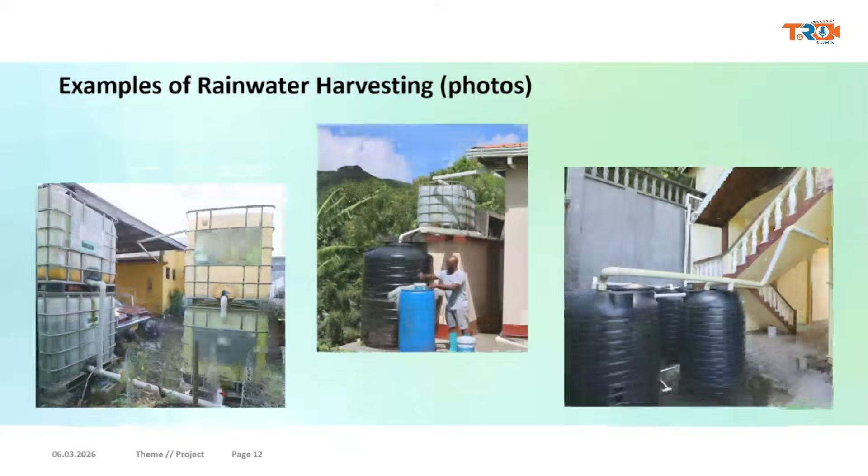These are just some images of typical systems, and I want to go straight to dealing with the water sector challenges in Grenada. The key question this afternoon is, are there challenges with the water sector in Grenada, Carriacou, and Petite Martinique? The answer is, of course, yes. This is the reason we are here. And what are those challenges?

The challenge starts and ends with climate change. We currently have increasing temperatures, and you'll see a chart there with an upward trend, the top chart showing that for the last few years. Since 1901, that data is showing the trend up to 2021, the top chart, showing the temperature increase.

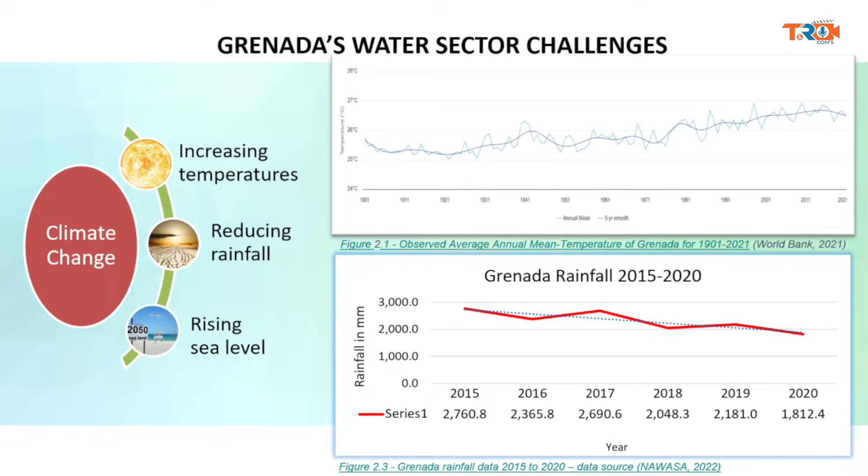And then the bottom chart shows rainfall decreasing. We only have data from 2015 to 2020, just a 5-year period, but this is the key challenge. Along with that, that is causing a rise in sea level. So all of this is compounding the issues relating to water and the scarcity thereof.

Additionally, we have other issues like aging infrastructure and economics, growing population, and also urban development, which are all posing a challenge. So what that has created for Grenada is a scenario I want to show you next.

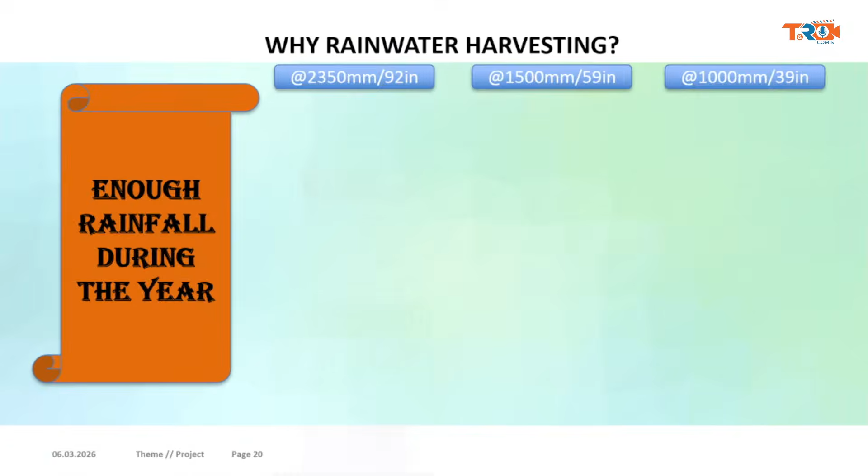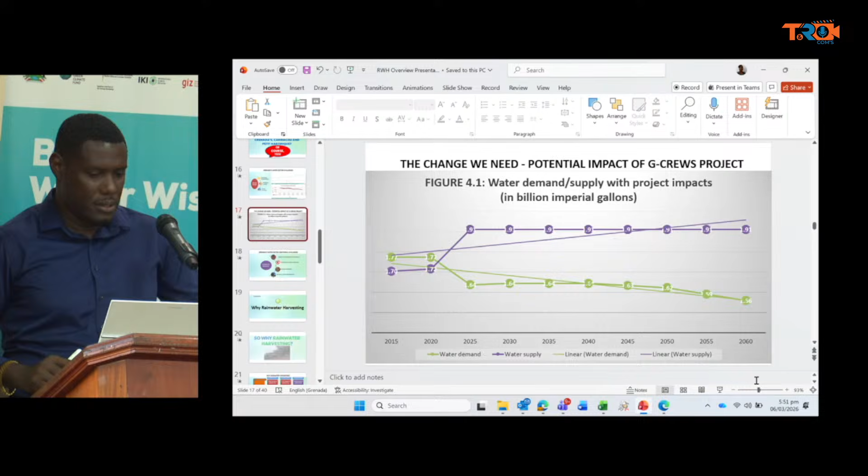That was moved to the bottom. Okay, let me just jump to it. Sorry about that, I have to quickly go to that and come back up. Jeanine at the back, can I just ask you to put the slide back to the top? The one with demand and supply. I don't know. Yeah. It goes after. Yep. Not this. This is after the one with the current, Grenada's current and projected water situation, BAU. Not this one, all right.

So while that is being found, I wanted to illustrate what climate change has caused. It was really important that you see this, because this is what we intend to do by rainwater harvesting, but we want to show the chart that's prior to it. Delete it. All right, so currently

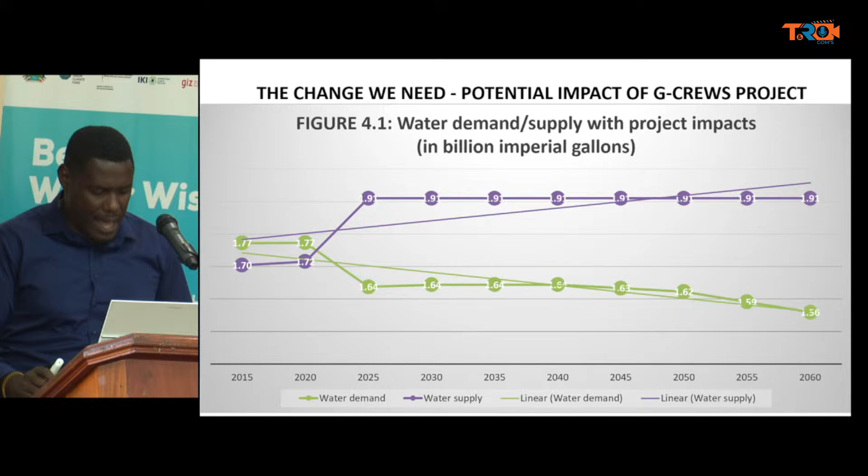Grenada's demand for water is about 1.8 billion gallons of water per year, and we're only able to supply about 1.72 billion gallons. While that looks close, it's a difference of about 80 million gallons every year. So that's a significant amount of water difference.

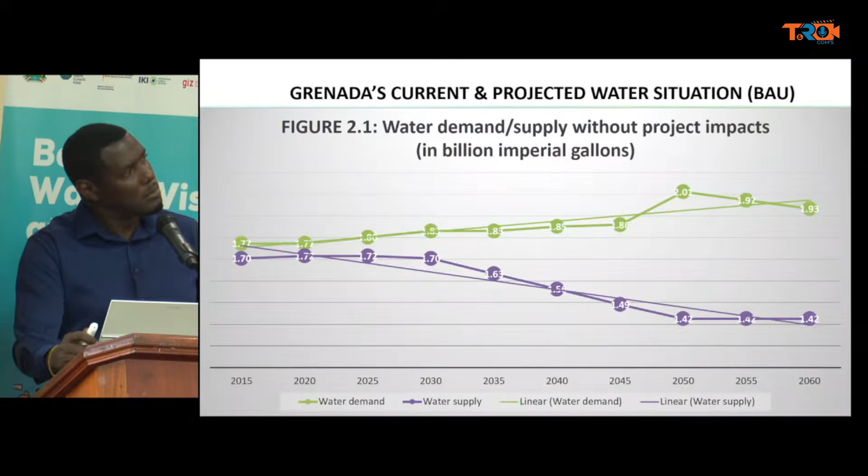And so the question now is, why rainwater harvesting? We may say, if we're having less and less rainfall, then why are we using rainwater harvesting as a safety net or as a mechanism to go through that period? The reason is simply because we have enough rainfall during the year. And if you would look on the screen, let me take a mic and step in front a little bit.

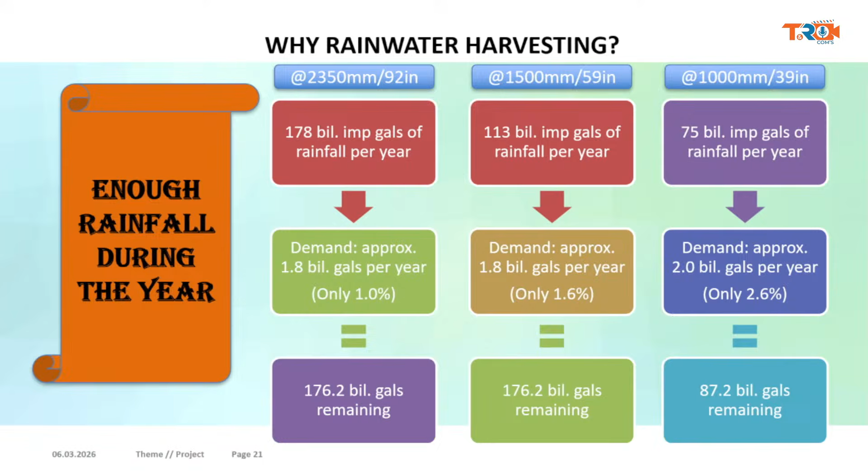So if you look on the screen, you notice that we currently get about 92 inches of rainfall every year, and that amounts to about 178 billion imperial gallons of water. We only need 1.8 billion gallons, which is only 1% of the amount of rain that falls on our island.

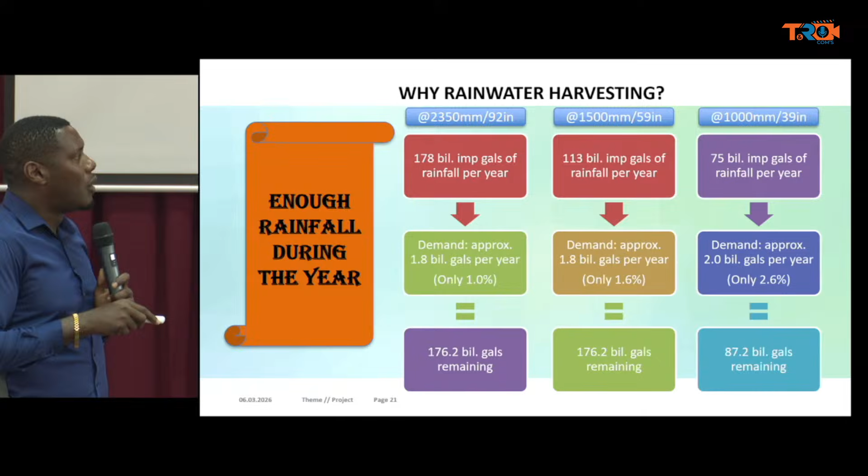In a bad situation, the rainfall drops to about 60 inches, equating to about 113 billion gallons of rainfall per year, meaning we would only use 1.6% of annual rainfall. We've projected a dire situation going as low as 39 inches of rainfall per year, and if demand increases to about 2 billion gallons, we would only use 2.6% of annual rainfall.

So what that tells us is we have sufficient rain falling on our island, even if rainfall is getting less. That means we just need to catch it and use it, and hence the reason rainwater harvesting is being promoted as a sustainable way for us to deal with our water needs.

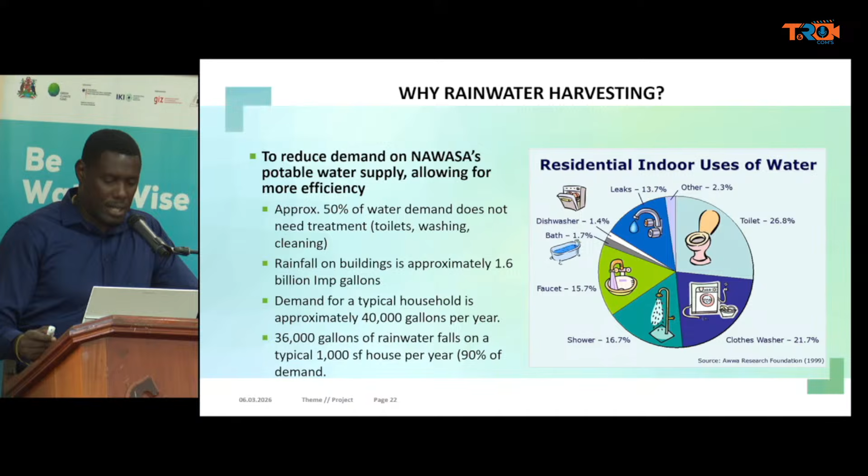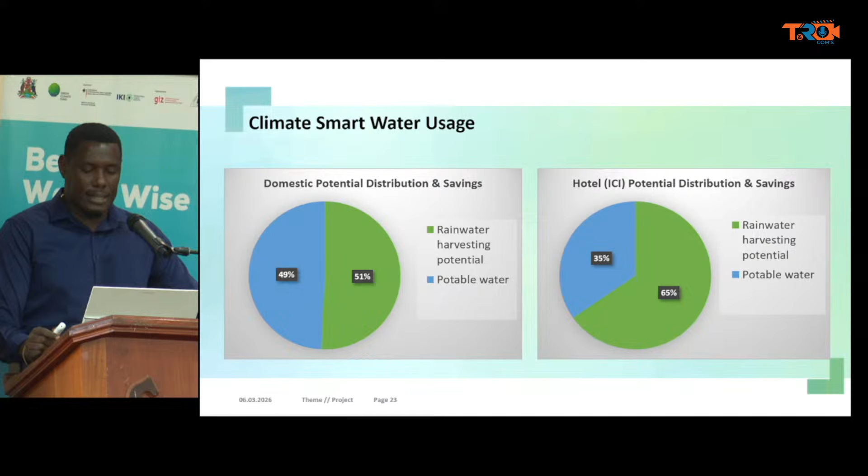In Carriacou, all the water comes from rainwater harvesting. This other chart will show us the potential for domestic use. We could save as much as 50% with rainwater harvesting domestically and as much as 65% commercially, especially in hotels and restaurants, if rainwater harvesting is used.

There are cost savings for using rainwater harvesting. Of course, the rainwater is free, and you will learn today that neither we nor NAWASA are going to be charging you for rainwater or for collecting it. So you can collect it and use the water free of cost, except for your initial installation of your rainwater system.

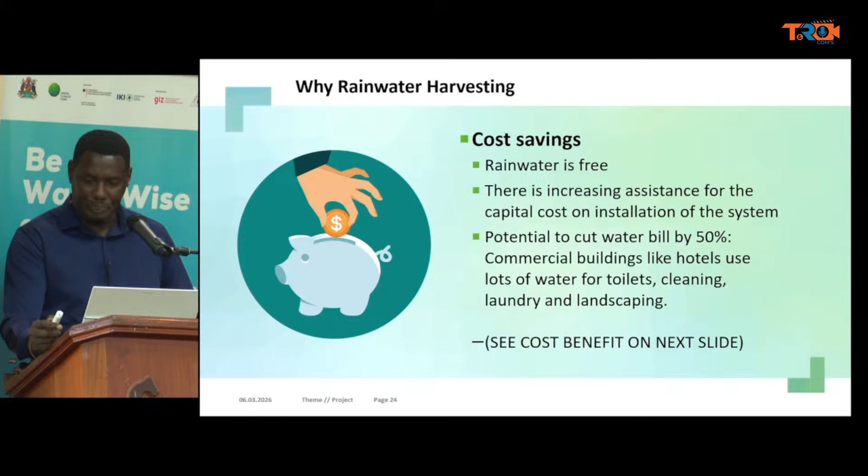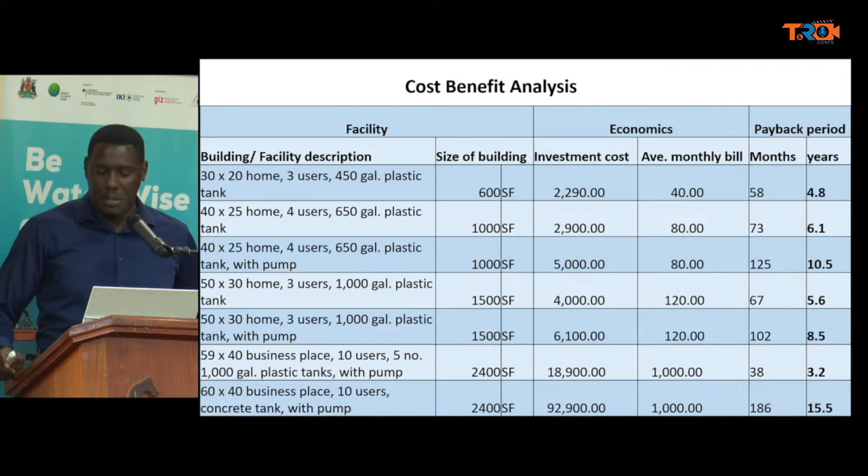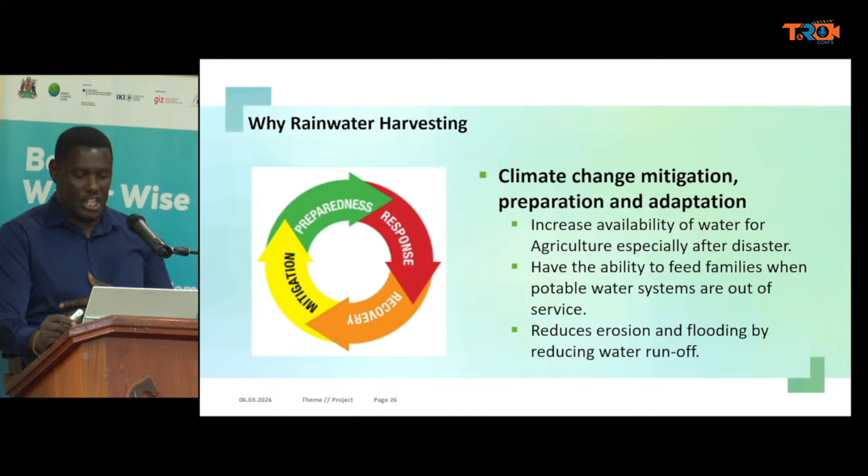So rainwater harvesting is also a climate change mitigation, preparedness, and adaptation strategy, but there are some limitations, limitations that we could work through.

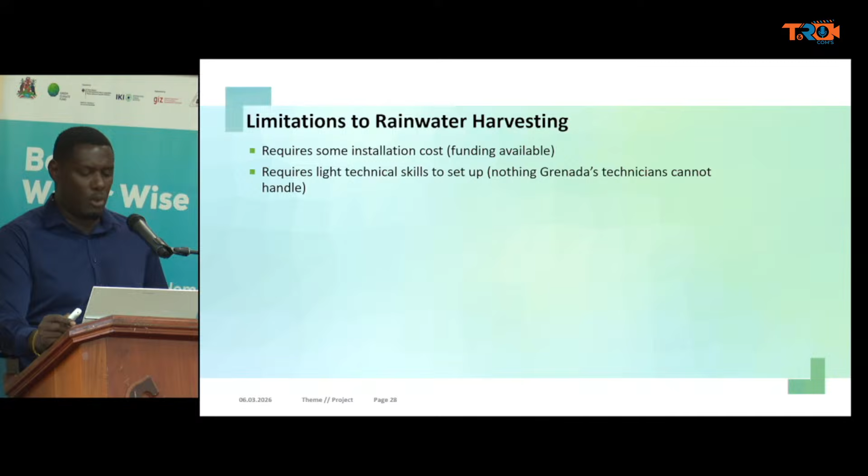First of all, it requires some installation costs. Then it requires some technical skills, which most plumbers can handle. There's an issue if we get little to no rainfall, and of course, we showed the graph to indicate that trends show we will still have enough rain even though rainfall has reduced.

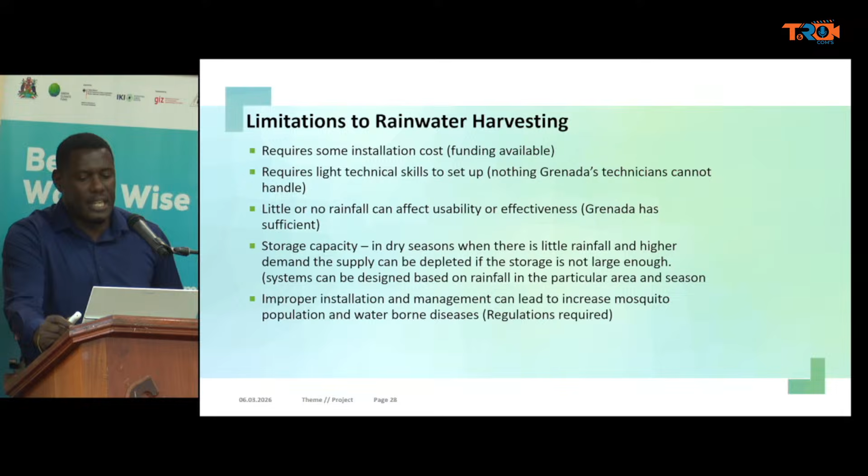Storage capacity could be an issue, and if rainfall is getting less, you'll have to build larger storage, increasing your investment cost a little bit. Improper installation and management can lead to increased mosquito population and other waterborne diseases, and the systems require periodic maintenance, like everything else. So we can mitigate against all of these limitations.

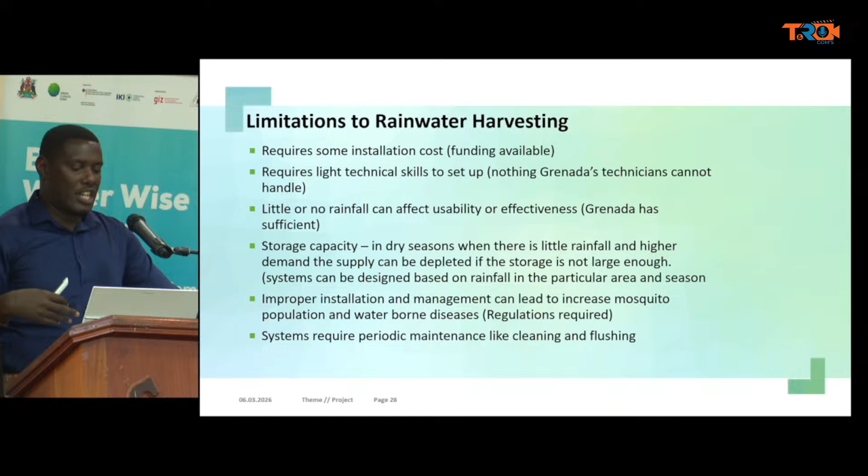This brings us to the recommendations, which were to make rainwater harvesting mandatory for new and existing buildings, and also make rainwater harvesting mandatory for all industrial, commercial, and institutional buildings and facilities, so all government facilities. We intend to have everyone have a rainwater system, similarly to Carriacou.

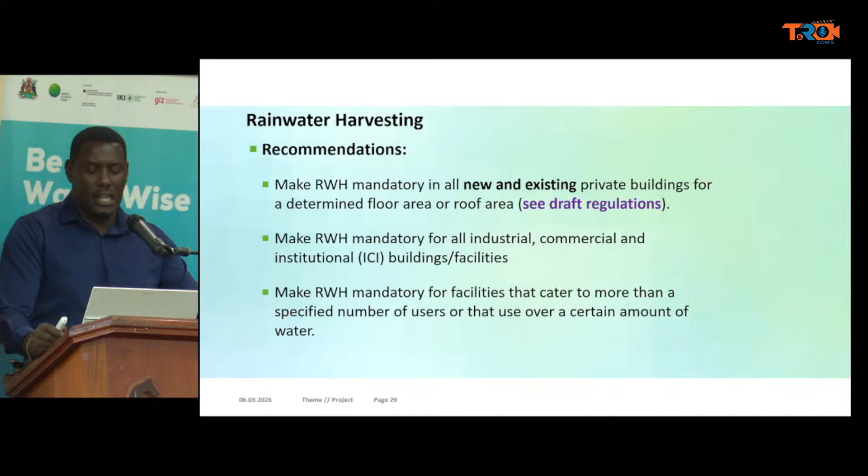So I will stop here at this time, and we're going to hear some more about the regulations itself, and later on I probably will tell you more about the technical aspects of the regulations and what it means for you and for us as a people. I will just put this on the table, I'm a civil structural engineer, also water engineer by profession, and so this has been developed and designed from both a scientific and a data-driven approach.

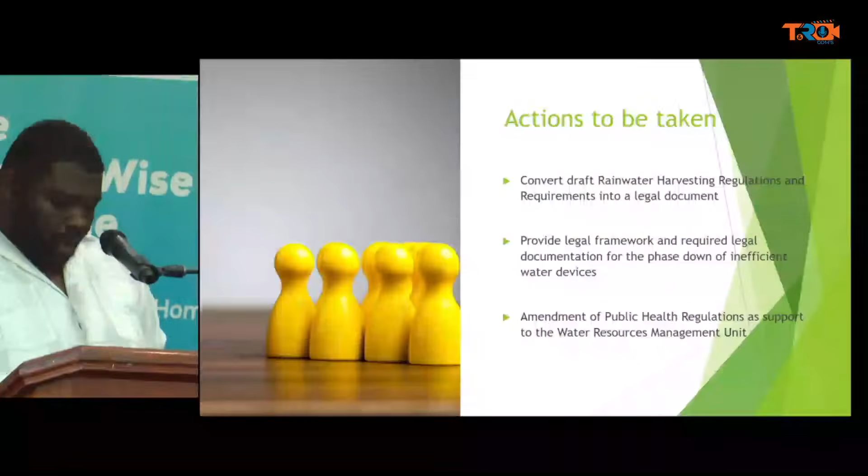Coming out of that, we also drafted a memorandum of understanding, so that suppliers would be able to provide, let's say, water tanks at special rates, and efficient water devices would be provided with rebates, just as some examples. So we did templates for that agreement.

In order to have legislation passed, most institutions need to take a cabinet memo with it, which is basically an introductory document that goes to the cabinet as well. So that was also drafted for the rainwater harvesting regulations. That is the single instrument we're going to be looking at this afternoon.

It is going to be within five parts. I'm not going to be too granular in the legal sense, but I'm going to provide a synopsis of what the regulations expect to do. There's the preliminary, which is more or less the beginning.

The design and planning requirements, which indicate the type of designs the rainwater harvesting device should have. There is the governance and institution part, which shows the framework and the responsibilities of the various government institutions. There will be the quality elements, including enforcement, and then there are the final provisions in terms of the operation of the regulation.

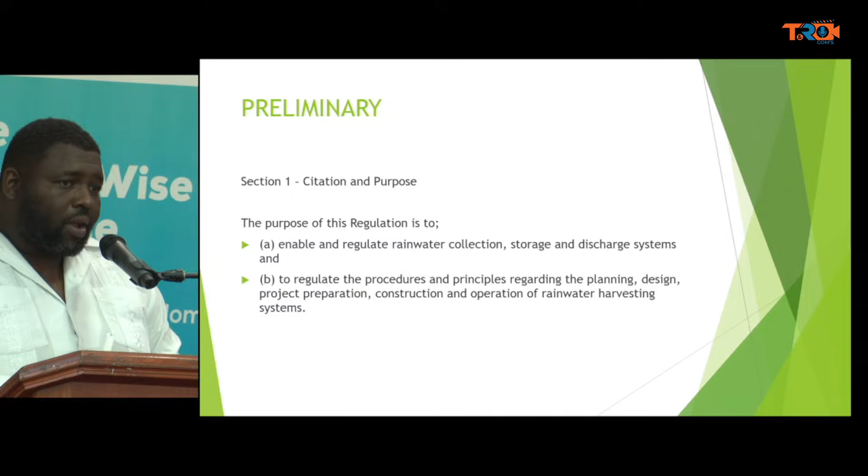It's important to note that this regulation is for the regulation of the rainwater harvesting system. Naturally, we cannot say when rainwater is going to fall. What this is about is being able to capture that rainwater and convert it to positive use. So definitely you wouldn't be charged for not catching rainwater. You just have to be able to conserve it and use it wisely.

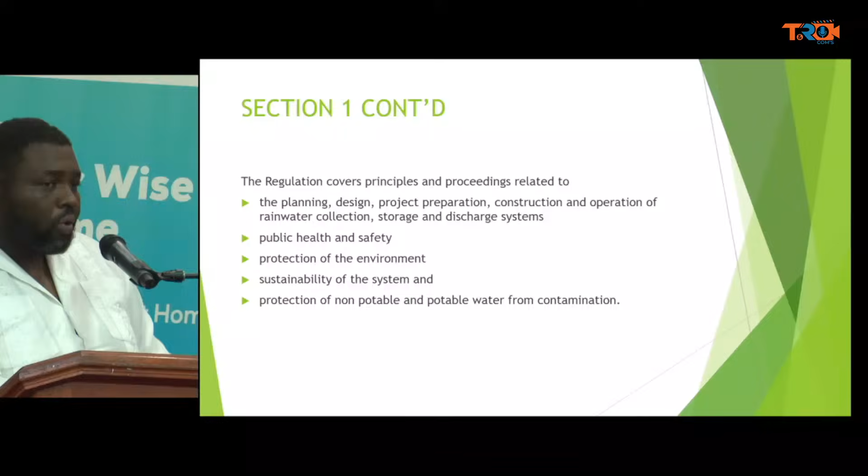Also important to the regulation is public safety. You have to ensure that the water is of a quality that could be used. You also have regulations which I will come to. You need to take particular measures if you want to use the rainwater for drinking purposes as opposed to non-potable or non-drinking purposes.

In terms of design planning, if you are designing a new building, you have to submit an application to the PDA that has to have an outline for a rainwater harvesting system. Your building has to be at least 250 square feet or 23 square meters. If it's less than that, a rainwater harvesting system will not be needed. But anything from 250 square feet and up, for domestic, which is residential purposes, you would need to have a rainwater harvesting system, and depending on the size of your residence, that would determine the size of the system.

Naturally, if you have a commercial enterprise or business, or an institution such as this school, they're going to have a higher requirement in terms of the rainwater harvesting system.

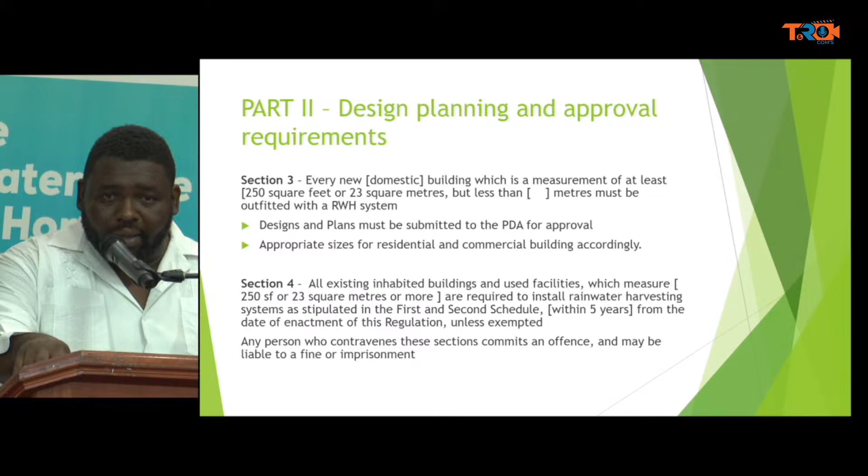Now, we come to buildings that already exist. They will also be required to submit to the PDA the rainwater harvesting system which they will be implementing, and they will have a period of five years to implement it, also starting at 250 square feet. So this is expected to be mandatory for all citizens of Grenada who have a residence. Now you may ask, are there certain areas where persons may be exempt from doing this?

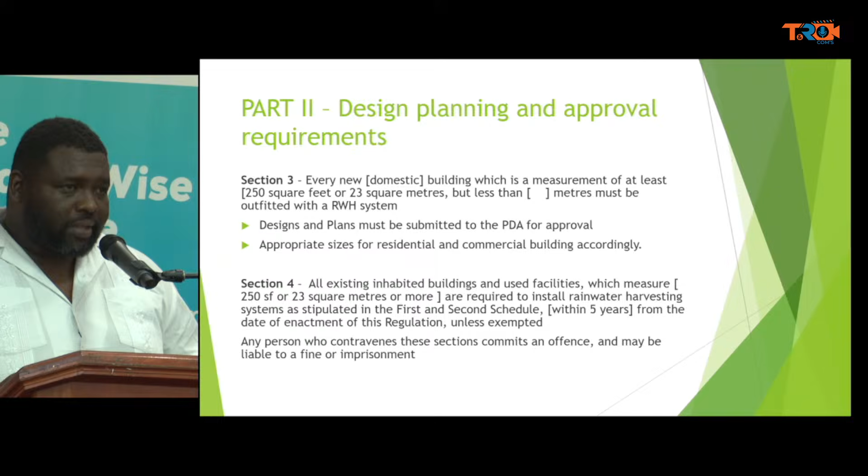And that answer is yes. So the PDA would be the body to determine what these exemptions would be.

However, some of the guidelines would be, let's say, it's a vulnerable household, or a matter of public safety. For example, if the area for the rainwater device is close to someone's boundary and could fall onto their roof, that would be a public safety issue. If a person is able to function with pipe water to their residence, and this can be determined, they may be able to have an exemption. They may also look at things such as age and financial circumstances, but each case will be looked upon on its own merit.

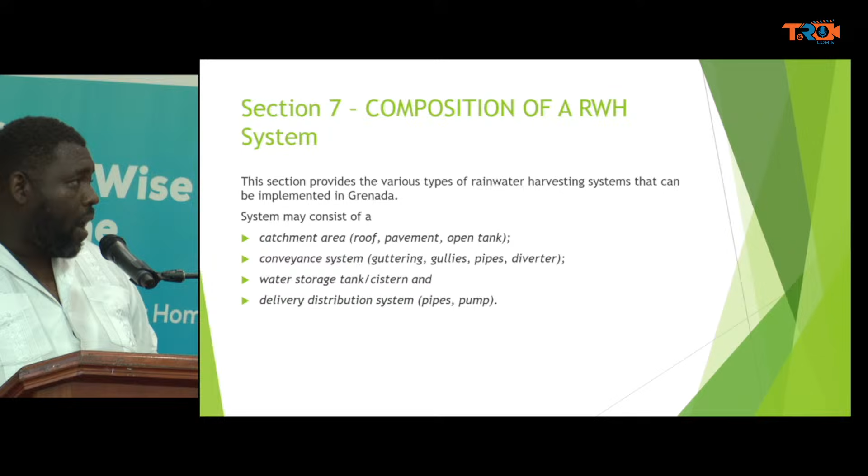Now we look at the composition of the rainwater harvesting system. These are best practice recommendations, but essentially, in summary, it's going to need a catchment area, which could be a roof or an open tank. It's going to need a conveyance mechanism once it's into that catchment area. Then you're going to need the actual storage, which could be a cistern or water tank. And then you need the delivery mechanism, let's say pipes, or pipes aided by a pump.

Section 8 deals with the structure to facilitate the system. These have to be designed by various personnel. Naturally, if it's a very small house with one tank, a certified plumber, for example, will be able to indicate the type of rainwater harvesting device you have. The larger it gets, the more technical the person needs to be.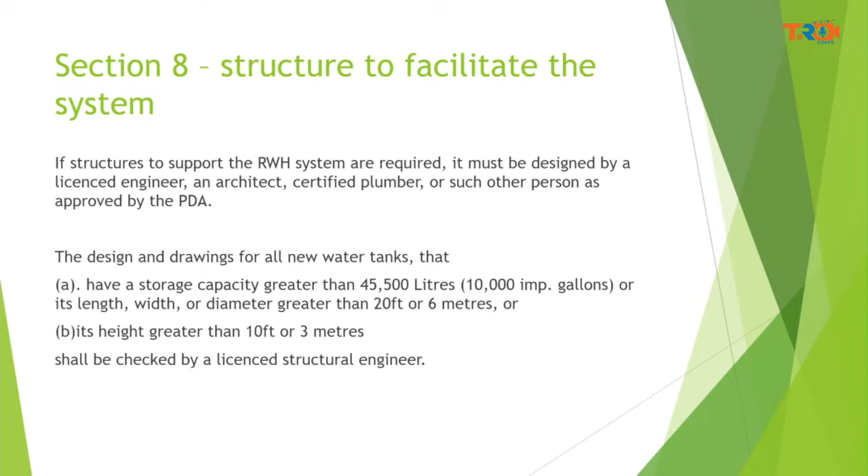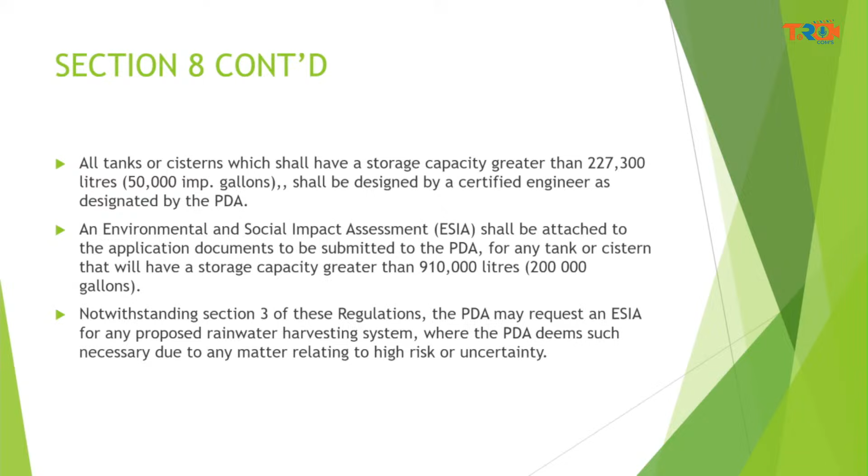So as you go forward, if it's like 10,000 gallons, for example, you're going to need an actual draftsperson. If it's even beyond that, you're going to need an actual engineer.

In terms of governance and administration, the PDA is going to be the body for the governance of this act. Coming under their act, these regulations will be formed because it's primarily a planning aspect. And they will be aided by the various government enterprises where necessary.

For example, they could be aided by the Ministry of Health, NAWASA. We have some consultations with Carriacou. In that instance, if they have any concerns, they can liaise with the Ministry with responsibility for Carriacou and Petite Martinique affairs and local government. But it is intended to be an integrated mechanism, so it's not just PDA alone. They're going to be working with other government agencies to make sure this regulation works best for the citizens of Grenada.

Naturally, you need to have enforcement mechanisms. Where persons may have a tank and it's suspected that it may not meet the relevant requirements, or they're serving non-drinking water as drinking water, the PDA has powers within their act to use inspectors to check out residences, and this has been linked in this legislation. If they need extra assistance—let's say the person isn't letting them into the residence, or releases their dogs—they could get the police force to come and assist them.

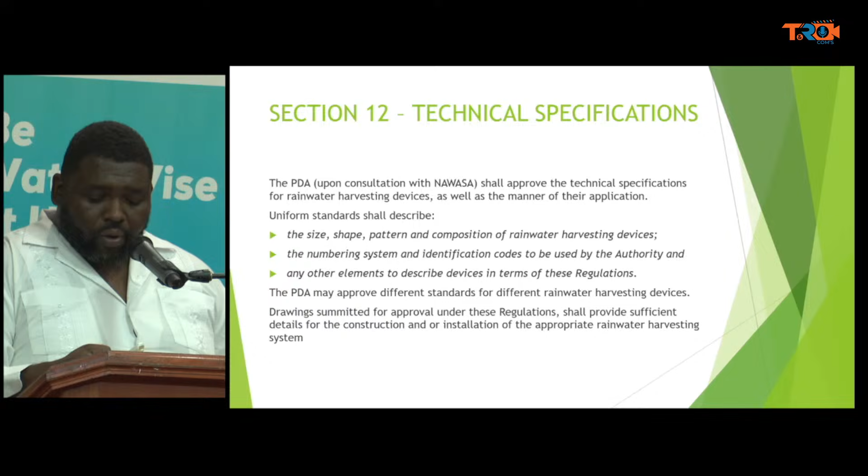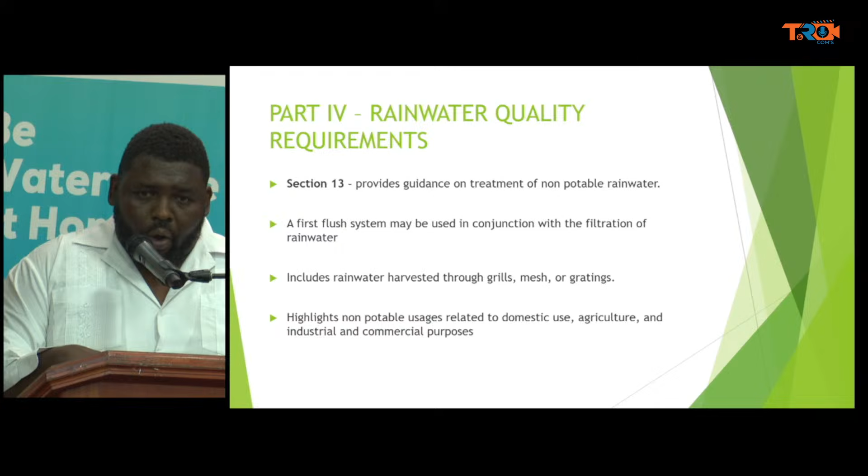They're also in charge of doing the various technical specifications, let's say identification numbers. That's one aspect. Now we come to the rainwater quality requirements. These are, of course, based on best practices. You need to have a first flush system and a diverter as well. And you need to ensure that we're dealing with water for non-potable or non-drinking purposes.

However, these are still prescribed with a limit. So you can't use the non-drinking water, let's say, for bathing or brushing your teeth, because it would still be a health hazard. So there are certain elements which you can do, based on the best practice mechanisms.

Naturally, you have to have some sort of filtration system to ensure that when it's captured—whether it's grill, mesh, or gratings—the rainwater could be used in toilets, washing clothes, watering plants, scrubbing and cleaning, once it has adequate treatment. For agricultural purposes, feeding of crops, feeding of animals, cooling off of machinery, are some of the areas it could be used for.

In terms of commercial enterprises, again, use in toilets, laundering clothes—especially in the hotel industry, as this is a very big tourist jurisdiction—scrubbing and cleaning, landscaping, which is dealing with the plants around a residence or business, as well as mechanical cooling once the water has had adequate treatment.

So we now come to—sorry, I can barely see this, give me a second.

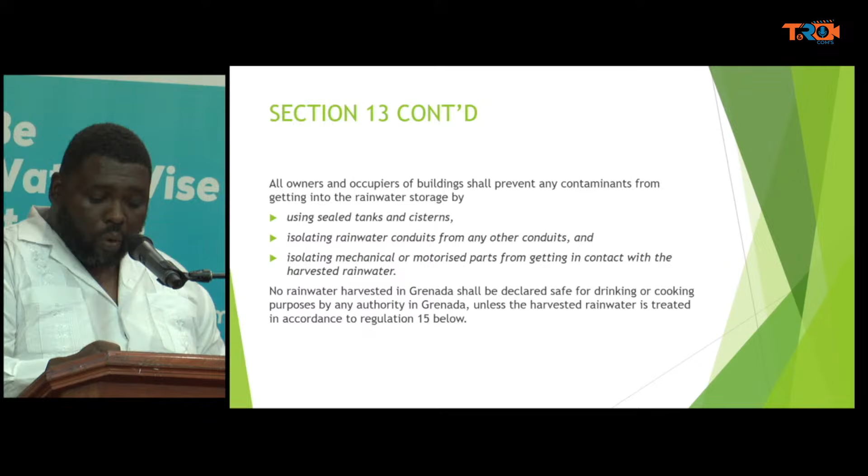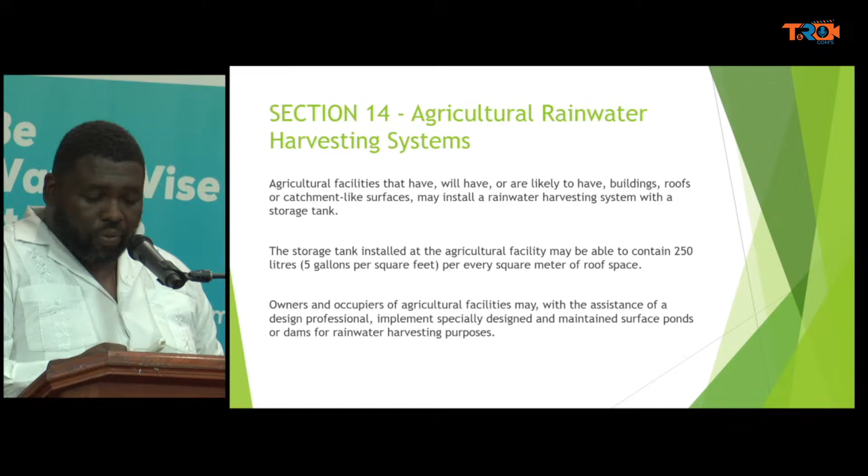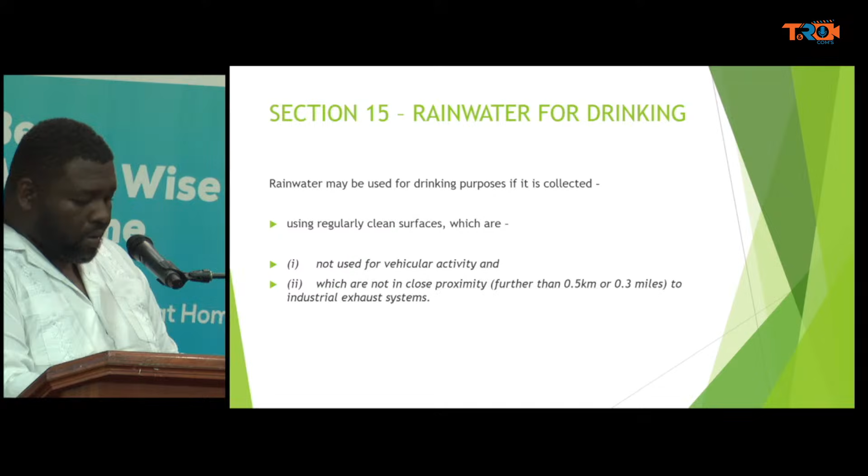So now we come to the rainwater for drinking, or the potable rainwater. The place naturally has to be very clean, so it has to be completely clear from vehicular activity as well as industrial fumes. That is going to be a very important aspect of it, because you don't want to have contamination for something that is going to be consumed.

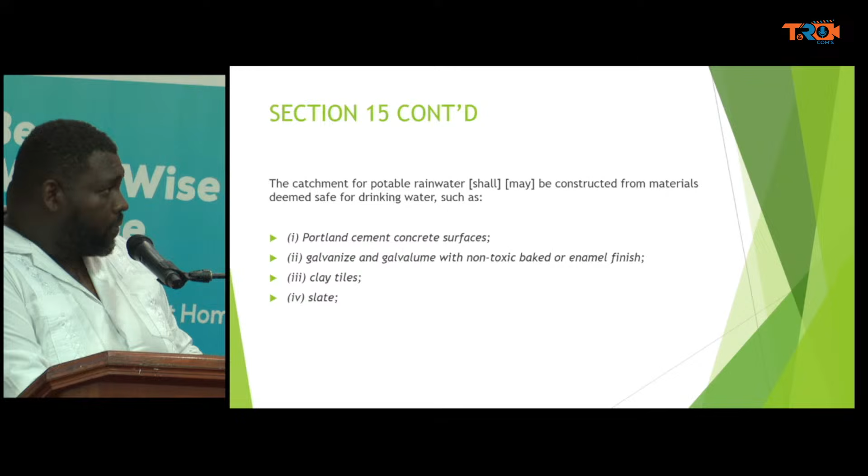There are very specific recommended surfaces for the capture of this water. As you can see, I won't go through everyone, but there's like Portland cement surfaces, clay tiles as well, galvanized, PVC, plastic, but basically materials where you don't have to worry about toxicity.

Then, of course, the filters, boiling, iodization, chlorinization, or the adding of chlorine to it. Filtration, you can use advanced techniques such as sand or stone, or basically anything which the PDA puts forward that will make that water adequate for drinking.

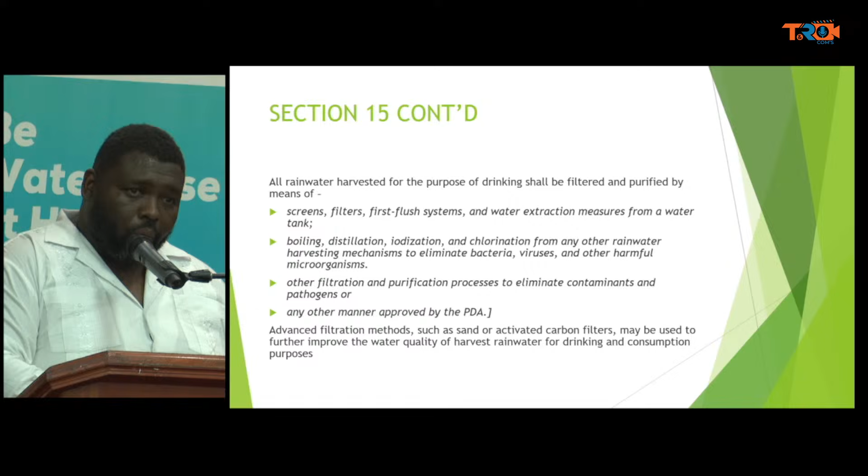What the regulations also do is give you an idea of what, for example, water running off the road that comes off of asphalt, that cannot be used. Anything treated with asbestos covering, that also cannot be used. Things are discovered accordingly.

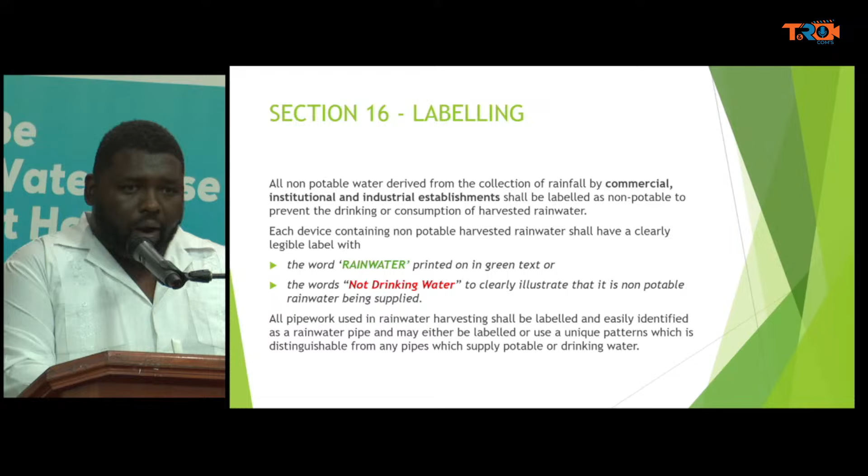Labeling. So this is for a system with either the word rainwater in green or the text not drinking water if it's not potable water, and it has to be separate and apart from the pipe water system so that it is known that this particularly is the rainwater system and it could be adequately and quickly identified, especially if it's an emergency circumstance.

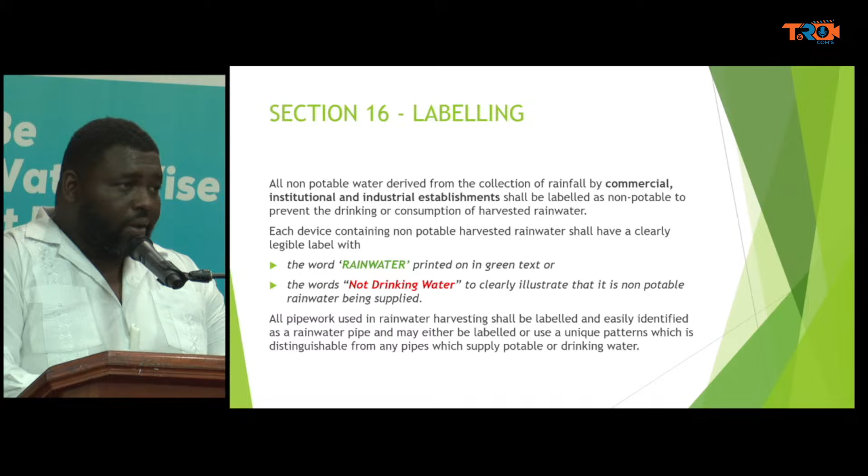So as incentives, the government could look at things such as tax rebates. If you're a business person and you're bringing in the tanks, perhaps some kind of tax mechanism, some sort of duty-free mechanism, which you believe is there for environmental purposes already.

Components, for example, you may get a tax rebate for having such a system on your home. You may even get grants in order to have such a system. As I said, I'm not saying this is what's going to happen, but the law makes it possible for the minister to consult with the minister responsible for finance, and they could design a relevant incentive package. The possibility is there in the regulations.

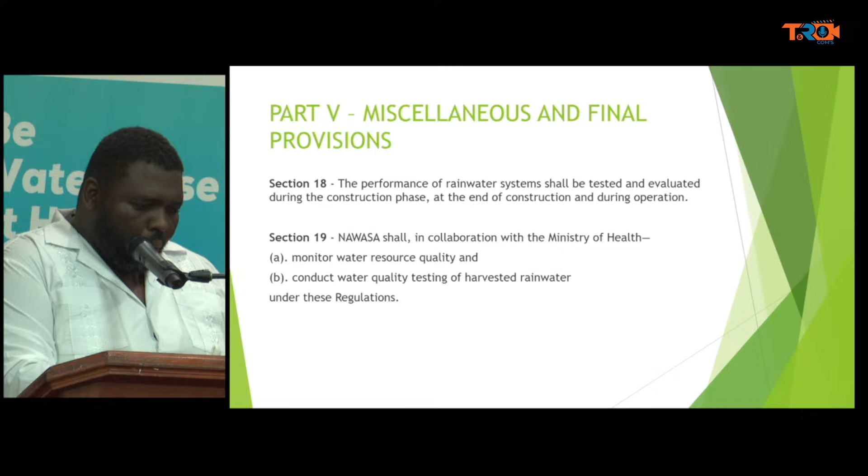So now we come to the miscellaneous and final provisions. More or less, this one speaks about ensuring that there is adequate maintenance, and it indicates that other entities such as NAWASA and the Ministry of Health can participate in measuring the rainwater to ensure that it's adequate for the use that it's being used for. They'll work with PDA in that regard, but they will be the actual scientists and technical experts testing the water itself, because the water testing is not PDA's mandate.

So other legislation was looked at in terms of the type of penalties. For example, you could look at $1,000 for an individual in breach up to maybe $20,000. And then for a corporation, maybe $5,000 initially, up to $250,000. And then perhaps for each ensuing day, there could be a continued fine.

But I just want to say, because of the instructions given, this is an absolute last resort. What I'm instructed is that they'll be looking at compliance mainly. So if you're having trouble complying, the penalties are a last resort. They could provide an action plan for you. They could look to have technical assistance for you. They could even look to have administrative penalties, so something relatively minor as a mechanism instead. This is only really a last resort for very hard-ears persons that would be like, government can't do me nothing, I'm not changing anything and not installing anything, giving people rainwater that's not proper. That's where the stiff penalties would come in.

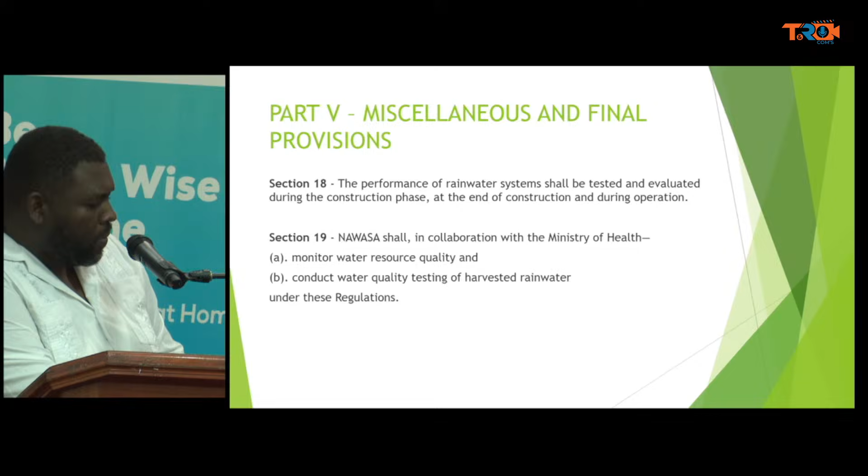As I mentioned, this is to ensure that a company doesn't decide, well, this penalty is only $2,000, so I'll continue to give persons rainwater that's not treated because it's cheaper for me than to buy a system with sand, stone and chlorine. So they have a much higher penalty to deter them from taking such action.

Sorry, this up and down mechanism is a bit confusing.

So the last elements of the legislation deal with the right to appeal. The PDA has a tribunal, so if you are against any decision that Mr. Gilbert and his staff makes, you can invoke the PDA tribunal. If you don't like the tribunal's decision, you could take it a step further and go to the court itself.

The PDA also has the power through the minister to make rules and guidelines, so they may be able to give guidance on the further operational aspects of any part of the act. I've heard in consultations persons asking, in terms of fees, let's say you're making an application, what the fee is - that's going to fall squarely on PDA and not within this regulation. Because these things can change from time to time, and you don't want to have to keep going back into the regulation to change it. So that's where the rules and guidelines would come in.